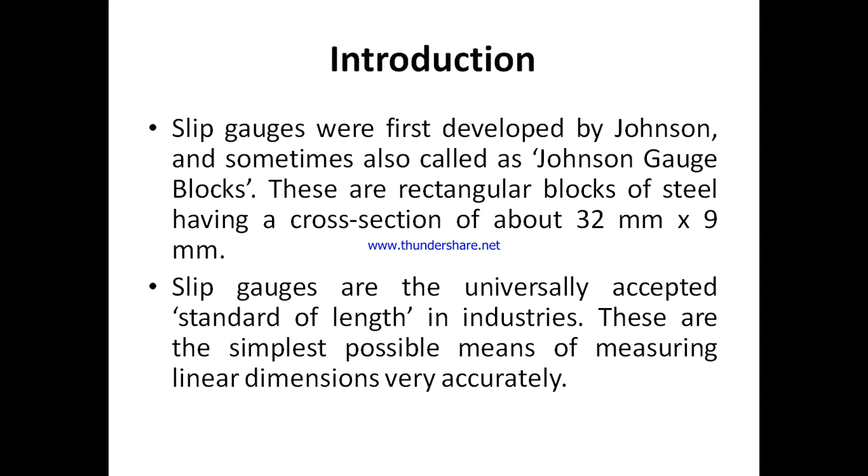So what are the slip gauges? First, we take the general introduction of slip gauges. Slip gauges were first developed by Johnson, and sometimes they are also called Johnson gauges or Johnson gauge blocks. These are rectangular blocks of steel having a cross section of about 32 mm into 9 mm. Slip gauges are universally accepted as a standard of length in industries. These are the simplest possible means of measuring linear dimensions very accurately.

So what is the need of slip gauges? For tool room and other precision work, the ordinary methods of measurement are not always accurate. Micrometer and vernier caliper can be used to check tolerance fine within up to 0.002 to 0.02 mm, but for fine tolerance they are not effective. Thus, there is a need of an instrument which can measure the fine tolerance limit. The means to do so are slip gauges.

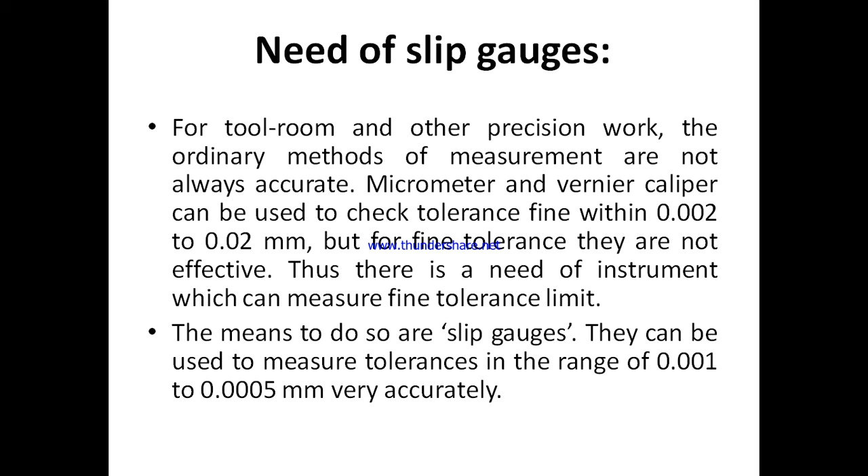They can be used to measure tolerances in the range of 0.001, that is up to 1 micron, to 0.0005 mm very accurately. So you can understand the slip gauges are nothing but square hardened steel blocks which are manufactured for improving the accuracy, or to check, or which is used as a standard in the industry.

So what are the grades of accuracy of slip gauges? There are slip gauges available in different grades. Slip gauges are made in 5 grades of accuracy: calibration gauge, which is used to calibrate the other instruments, grade 0, double 0, grade 0, grade 1, grade 2, in the decreasing order of accuracy.

Grade 0, grade 1 and grade 2 are used for general workshop purpose and are known as working gauge blocks. Meaning normally in industry or any small workshop, these particular grades are easily available. You can see over there.

These are the working gauge blocks, whereas calibration gauge grade, also called master gauge blocks, and grade 00, these are the inspection gauge blocks, are used only for checking other types of blocks. That is, from the calibration grade you can check the inspection gauges, and from these inspection gauges you can calibrate grade 0, 1 and 2. So these are the general classification.

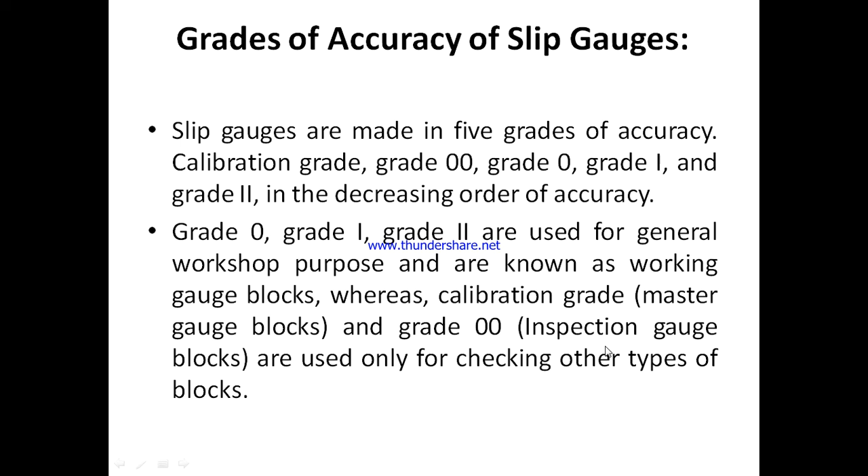So we can see one by one. Number one is calibration grade. This is a special grade used for experimental work, research work, and for measurement and inspection of other gauges. Grade 00, also termed inspection gauge block, is used for highest precision work such as measuring grade 1 and 2, as I already mentioned.

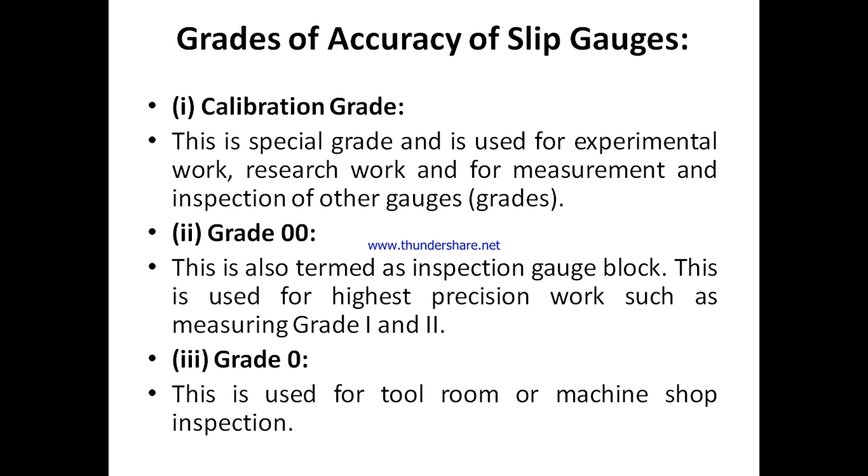Grade 0 is used for tool room or machine shop inspection, so normally in a lathe shop or milling shop you can observe this grade. Grade 1 is used for more precise work such as setting up sine bars, checking gap gauges, measurement of components, tools, etc. Finally, grade 2 is used in workshop for rough checks, ordinary inspection, and also for setting up machine tools and for measurement where production tolerances are relatively wide.

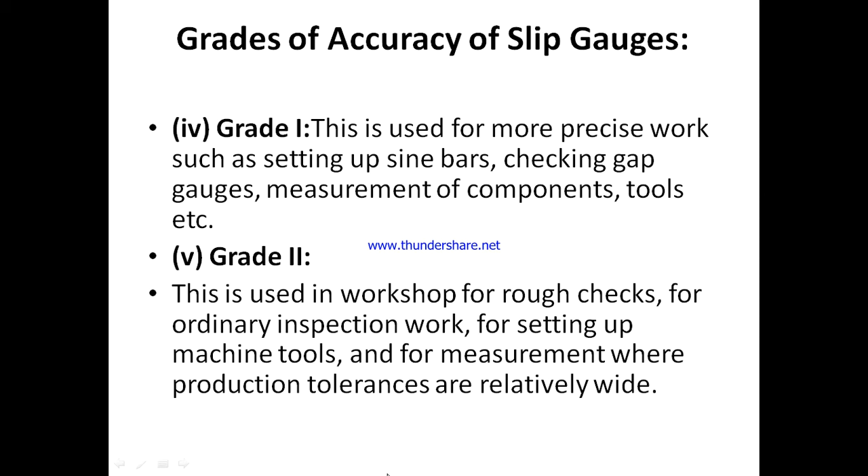Next is what are the different slip gauge sets available in the market for use. Gauge blocks are available in sets with steps of 10, 1, 0.1, 0.01 and 0.001 mm. On small size blocks, the size is marked on the measuring face, and for large blocks, the size is marked on the side surface. So the sets are available in metric as well as English units.

Letter E is used for inch units, that is English units, and letter M is used for metric units. The number of pieces in a set is given by the number followed by letter E or M. For example, E81 refers to the set whose blocks are in inches and 81 in number. Similarly, M45 refers to a set whose blocks are in mm and are 45 in number. So E denotes inches and M denotes mm; 81 numbers are in that block, and M45 means 45 slip gauges are in that box.

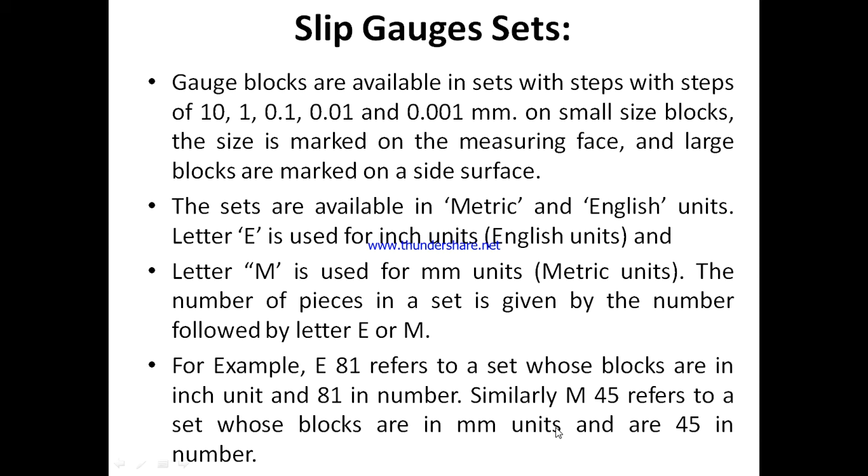Along with this, we have protective slips. Apart from these, about two extra gauges of 2.5 mm each are also supplied as protective slips. The purpose of protective slip gauges is to prolong the life of slip gauges. These are often made up of the same material as the rest of the set, or sometimes they may be made from tungsten carbide, which is a wear-resisting material. So protective...

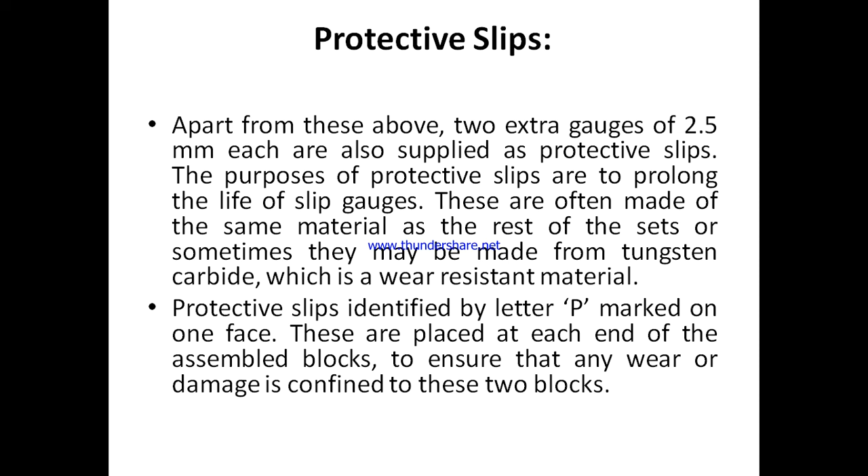Slips are identified by the letter P marked on one face. These are placed at each end of the assembled blocks to ensure that any wear or damage is confined to these two blocks. The use of protector blocks at each end of the slip pile will extend the accuracy and hence the useful life of the gauge block.

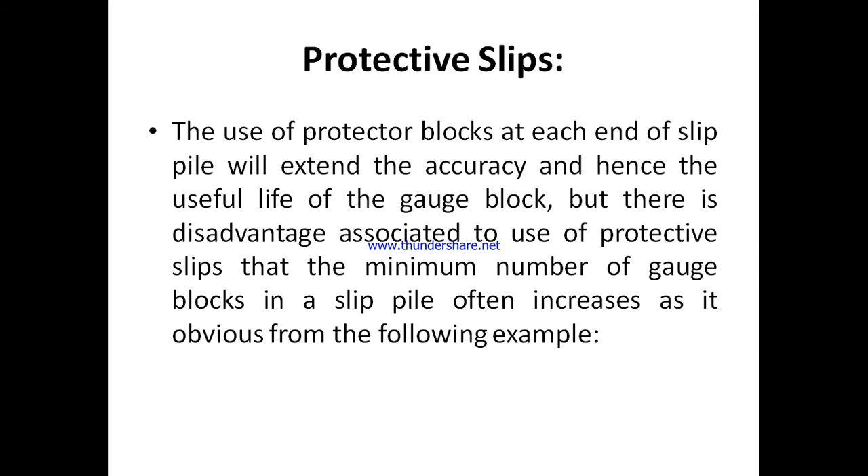But there is a disadvantage associated with the protective slip: the minimum number of gauge blocks in a slip pile often increases, as is obvious from the following example. Look at this, we can go through one by one different examples.

So how can we build a dimension using slip gauges? Building a size of 43.716 mm using a pair of 2.5 mm protector blocks and an M45 set. So an extra 2.5 mm protector block is provided in this particular block with a set of M45. So there is a rule: you can start with the last decimal place.

There is a 6, so 0.006, no gauge is available. So when we go for 1.7, the minimum slip gauge available is 1.001. But before going to the 0.001 mm, first we can use these particular 2.5 mm protector blocks, that is, two protector blocks of 2.5 mm each. So 2.5 into 2, that is 5. So 5 mm we can neglect from this main dimension.

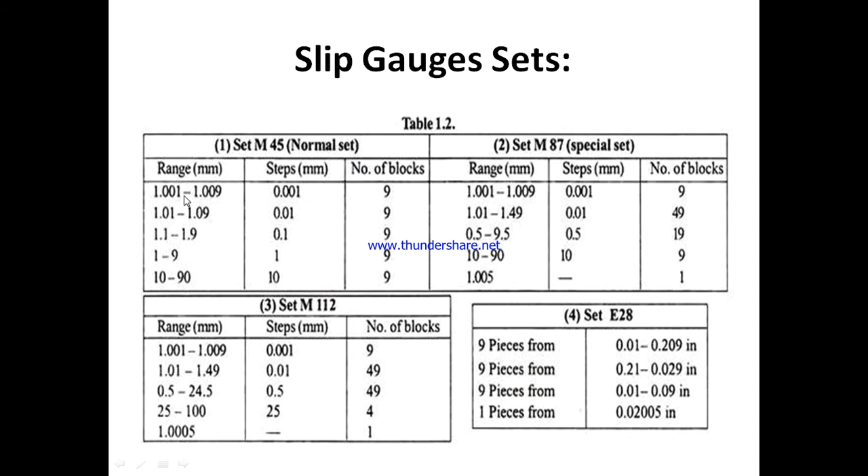We got 38.716, starting from the last decimal place. This is the last decimal place. Look at this, this is the last decimal place. So 1.006 - if you remove 1.006, because it is available in the M45 set, as you know. Look at this, M45, this is the M45 set, and within this, 1.001 to 1.009. So within this particular range, 1.006 is available. So minus 1.006, we got 37.710.

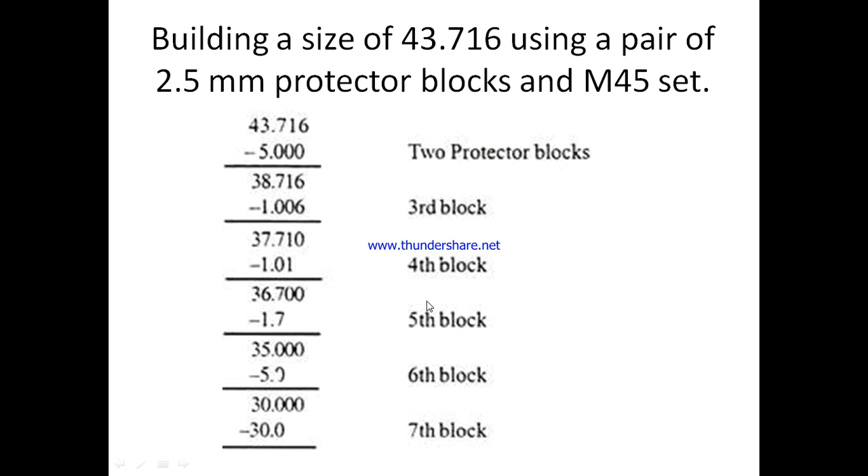Again we go for 1.01 for the fourth block, we get 36.70 - this is from the second range. Then 1.7 from the fifth block. This is the fifth block, and for 35 mm we can take 5 mm and 30 mm. These are the two blocks. So total 7 blocks are required to build this particular dimension.

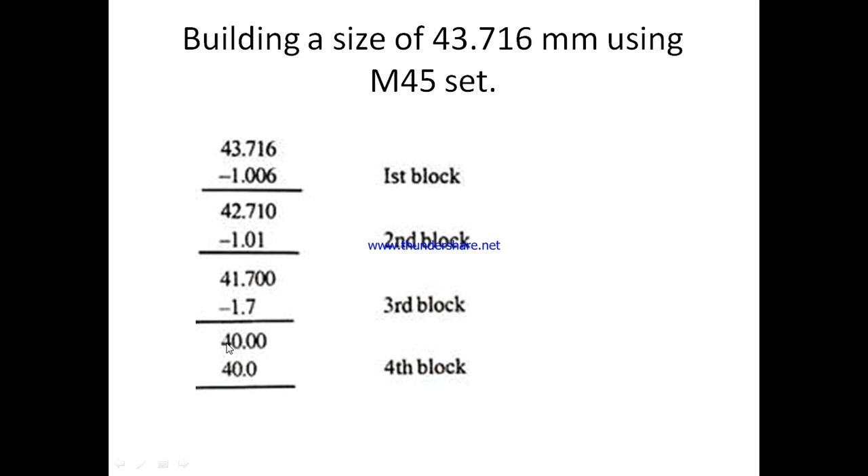Similarly, building the size of 43.716 mm using the M45 set. Look at this, 1.006, this is the first block, then 1.01. The rule is that you should start from the last decimal place, and the second rule is that you use the minimum number of slip gauges to build the dimension. So minimum number of slip gauges makes the best possible dimension. In this way we can subtract and take each slip gauge from the M45 set and build this particular block.

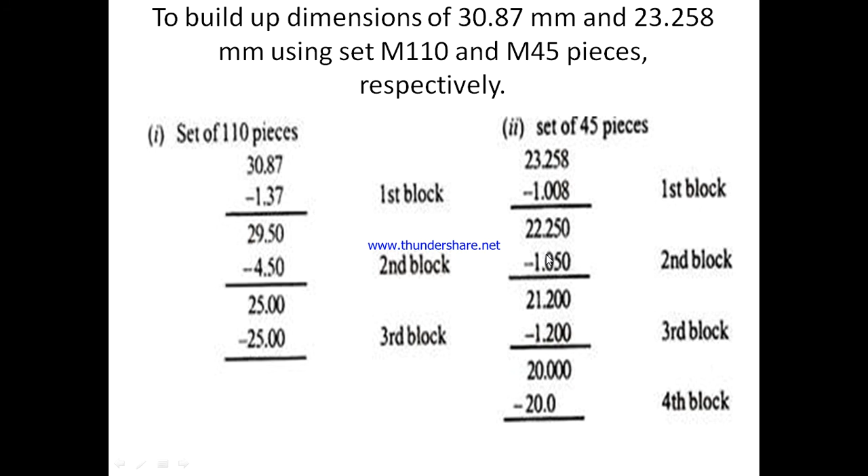Similarly, there is a set of 110 pieces and a set of 45 pieces. From these two we can successfully build the dimension.

So what is the wringing process in case of slip gauges? How can this particular dimension be built? This can be built using a wringing process. In the wringing process, first of all, two slip gauges are twisted together under a certain pressure. It will be found that due to the molecular attraction and the atmospheric pressure...

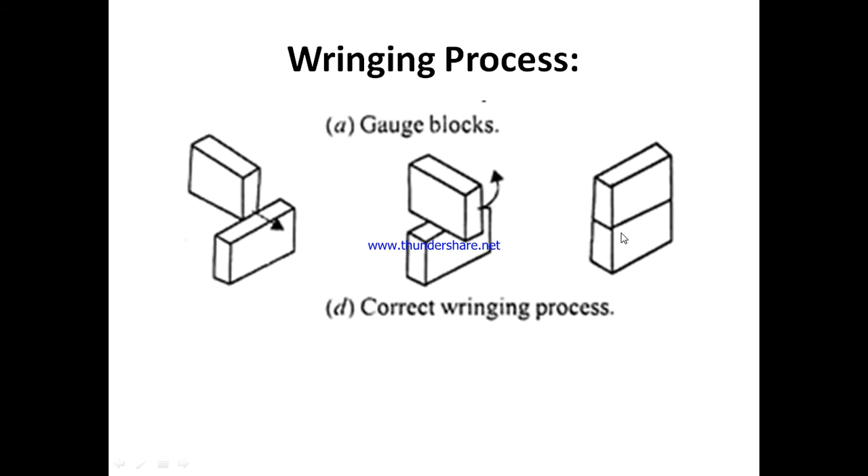Look at this, first of all take the two slip gauges which are going to be combined. Then they are cleaned using simple tissue paper or glycerin to remove dust and dirt. One slip gauge is placed on the other at 90 degrees. Then you twist it again to 180 degrees and move it along the side with gentle hand pressure. You can see that these two slip gauges are adhered together due to molecular attraction.

If two blocks are twisted together under certain pressure, it will be found that due to molecular attraction and atmospheric pressure, they will adhere to each other quite firmly. This process is known as the wringing process. It is very useful to produce a required size by assembling several gauge blocks. Before wringing the blocks, wipe them clean using a cloth or leather or cleaning tissue, removing Vaseline, grease, etc.

Or dust, remove the dust using petroleum jelly etc. Start wringing in the largest size first. Place two faces together - look at this - at right angle to each other.

With the pressure, twist through a 90 degree angle. This action should be smooth and with constant pressure. So in this way you can ring this particular slip gauge.

This process is called the ringing process. Then what is the accuracy of gauge blocks? The accuracy of gauge blocks is affected by temperature changes. They are accurate within the temperature of 20 degrees Celsius, that is room temperature, which is generally required for any metrology lab, and humidity controlled atmosphere.

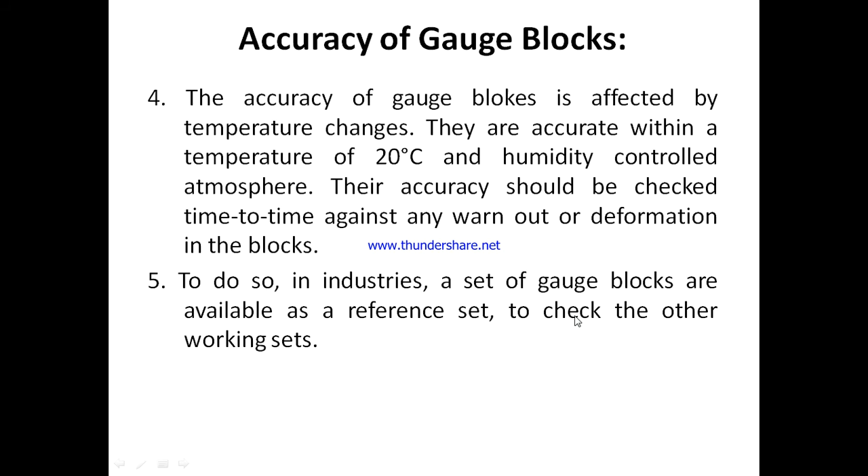Their accuracy should be checked from time to time against any worn out deformation in the blocks. To do so, in industry, a set of gauge blocks are available as a reference set to check other working sets. So what is the manufacturing process of slip gauge?

First of all, the high grade steel blanks are taken with the appropriate size, because it is made from high grade steel. They are subjected to hardening and roughing using a grinding process. Then they are subjected to a cyclic low temperature heat treatment to provide stability of the dimensions and to relieve the internal stresses.

So first of all, you take the high grade steel gauge blanks with the appropriate size. Then they are subjected to hardening and roughing using a grinding process. Then they are subjected to a cyclic low temperature heat treatment to provide stability of dimensions and to relieve internal stresses. A batch of 8 blanks of similar nominal size is mounted on the 8 coplanar faces of the magnetic chuck.

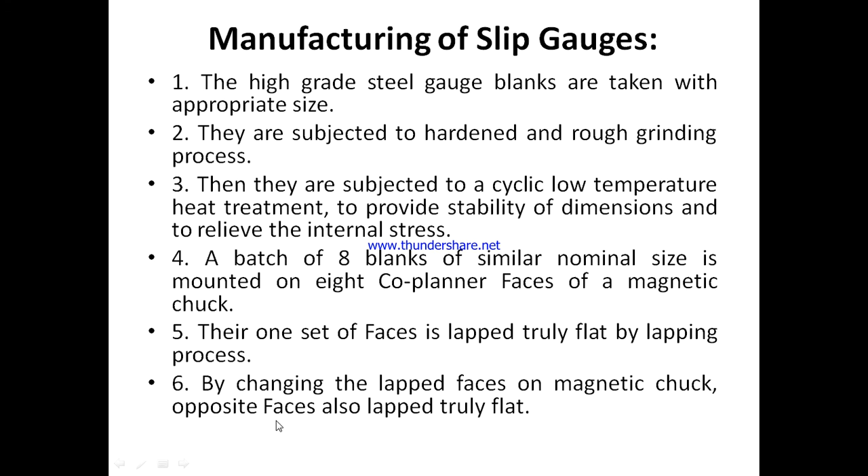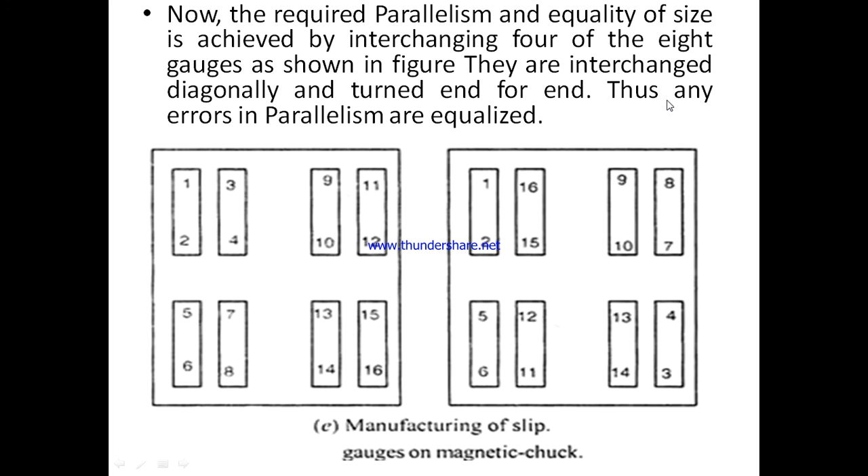Now the required parallelism and equality of sizes are achieved by interchanging four of the 8 gauges as shown in this figure. They are interchanged diagonally and turned end for end. Thus any errors in parallelism are equalized.

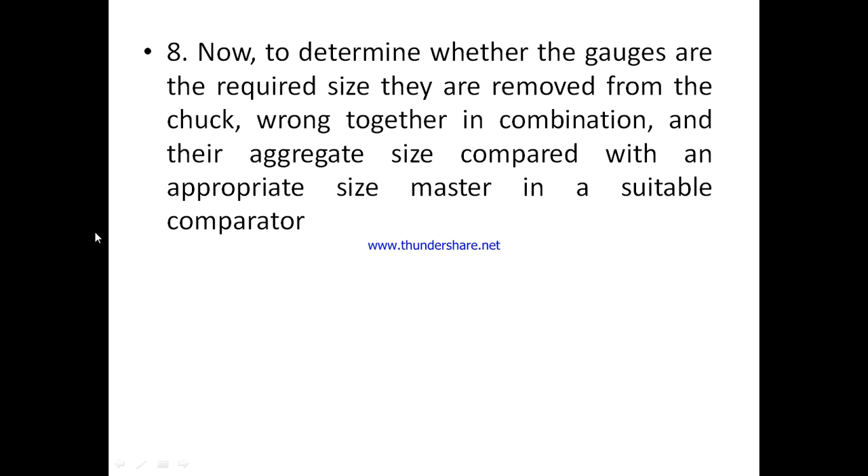Now, after the grinding or lapping, determine whether the gauges are the required size. They are removed from the chuck, wrung together in a combination, and their aggregate size compared with an appropriate size master in a suitable comparator.

So what are the uses of slip gauges? There are different uses of slip gauges. They are universally accepted as a standard of length. Second, they are used for direct precise measurement where accuracy of the workpiece being measured is high. They are also used in high magnification comparators to establish the size of the gauge block.

Slip gauges are also used for checking the accuracy of measuring instruments like vernier calipers. Slip gauges are also used for setting up comparators to a specific dimension, and they are also used to check a batch of components quickly and accurately.

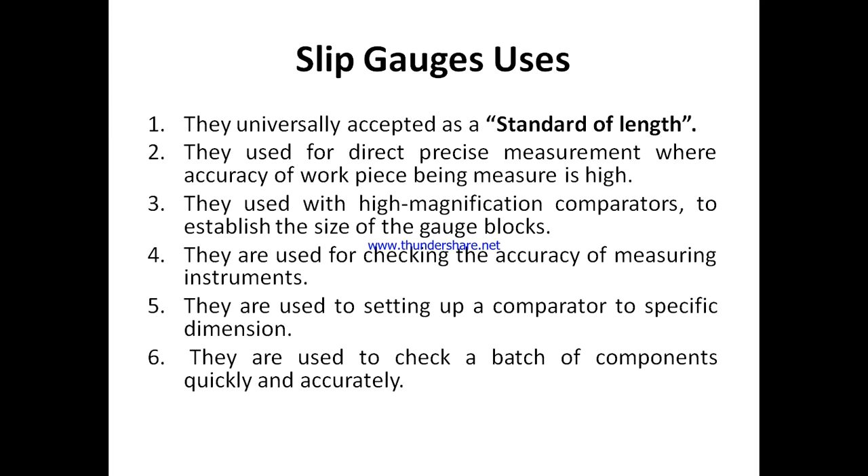So while using this particular slip gauge, certain care should be taken and points should be kept in mind. When it is not in use, the slip gauge should be kept in its respective position in the gauge box. Before wringing the blocks together, ensure that their faces are perfectly clean. Another care to be taken is that measuring faces should not be fingered.

Gauges should not be rung together over an open gauge box, due to the possibility of accidentally dropping a gauge into the box. Due to this possibility, any gauge or several gauges placed in the box could be damaged. So gauges should not be rung together over an open gauge box.

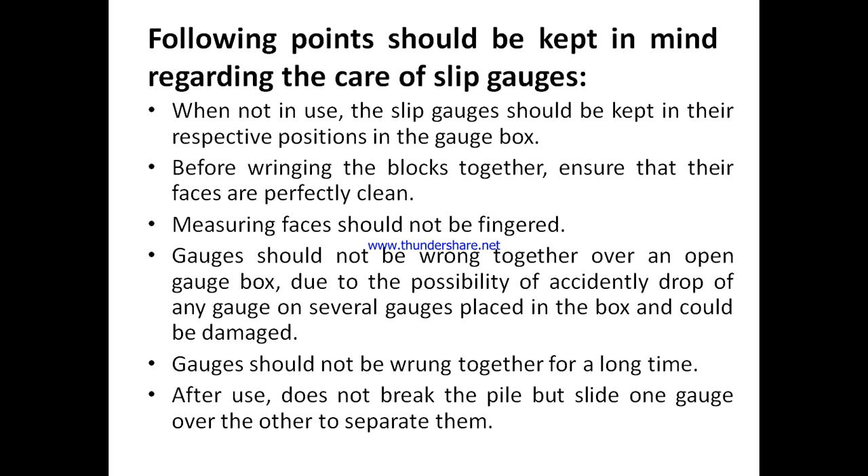Gauges should not be wrung together for a long time, due to this there is a chance of reduction in molecular attraction. After use, do not break the pile, but slide one gauge over the other to separate them from each other.

After use of these particular slip gauges, a thin layer of good quality grease should be applied on their faces before they are kept in their case. As far as possible, slip gauges should be used in an air conditioned room free from dust and maintaining a constant temperature. During use, their working faces should never be placed on the surface plate.

Check accuracy at appropriate intervals, because there is a chance of getting error. Use the minimum number of gauges for a combination, wrung together in a correct manner, and most important, use 2.5 mm protector slips whenever possible.

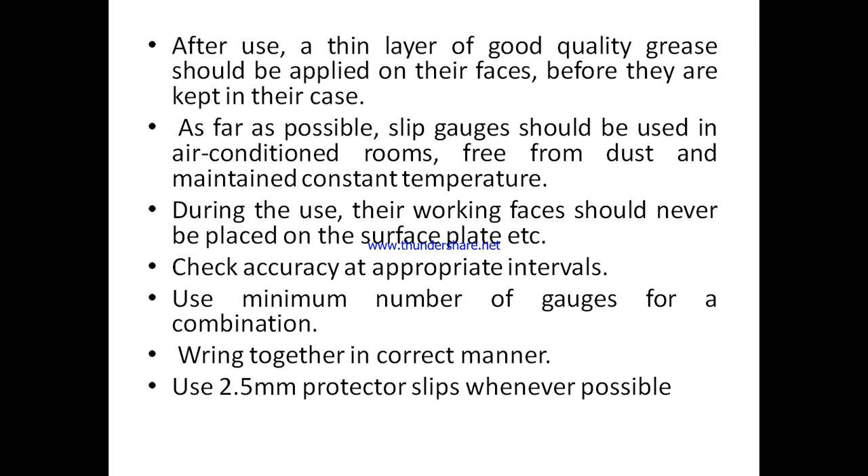So this is all about the details of slip gauges, starting from their material, their need, their importance, their wringing, their dimension building, their different applications, and their care.